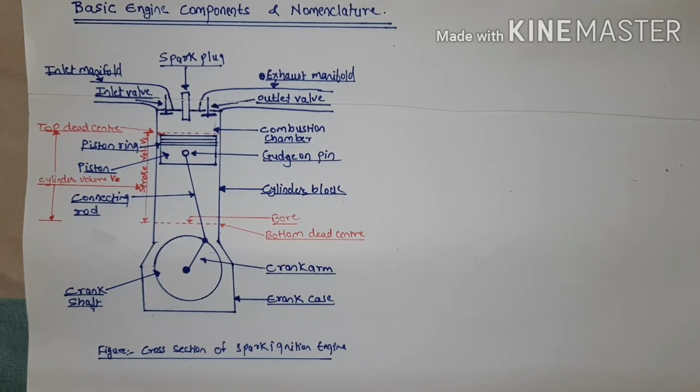Today in this video, I am going to teach you the basic engine components and nomenclature of an IC engine. Even though reciprocating IC engines look very simple, they are highly complex machines. There are more than 100 parts which have to perform their function satisfactorily to produce power output.

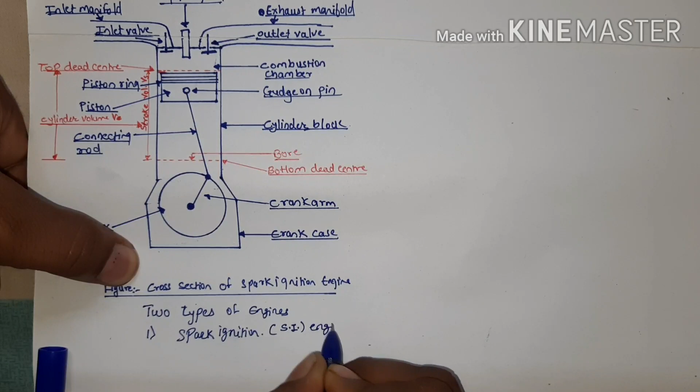There are two types of engines. First, the spark ignition engine, which we can shortly call the SI engine. Second, the compression ignition engine, which we can shortly call the CI engine.

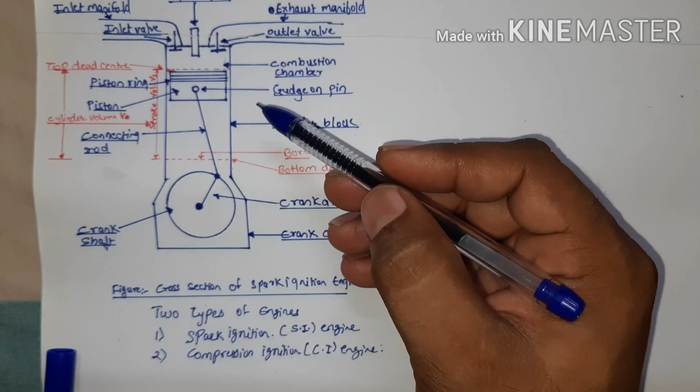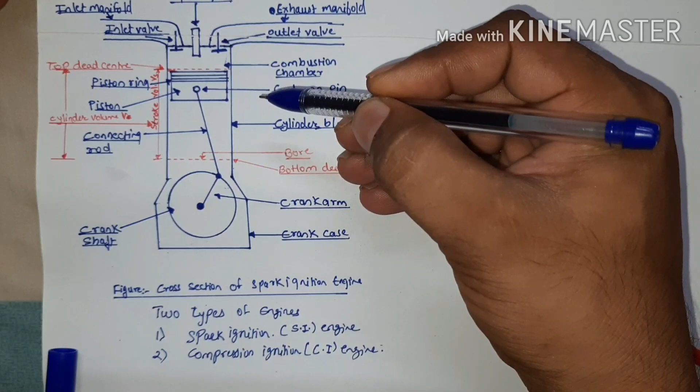Let us now go through the important engine components and the nomenclature associated with an engine. The cross section of the single cylinder spark ignition engine with the overhead valve is shown here in this diagram. The major components of the engine, their function and location I will explain in this video. As you can see, this is the complete assembly of the spark ignition engine.

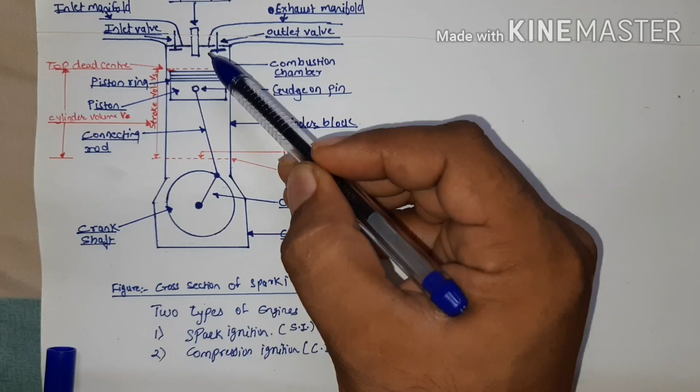The topmost part of the engine is known as the cylinder head. Below the cylinder head, there is a cylinder block. After the cylinder block, there is a crankcase. The main important component of the engine is the cylinder head.

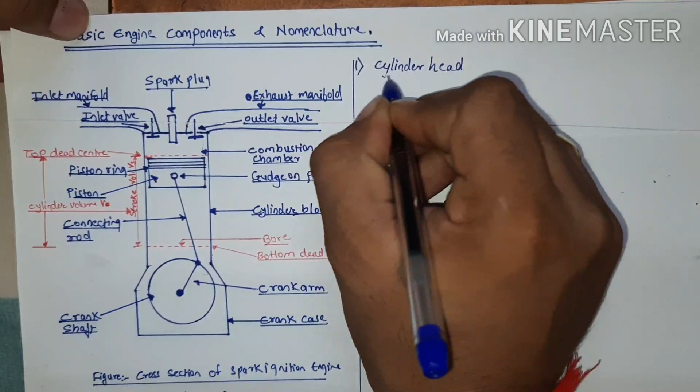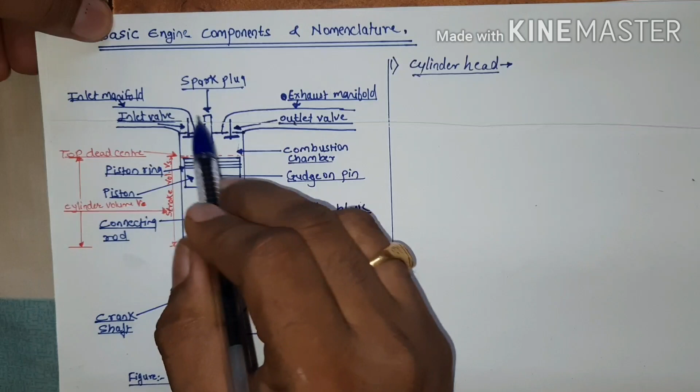The cylinder head consists of various components such as the outlet valve, the inlet valve, the spark plug, and the two manifolds - inlet manifold and exhaust manifold.

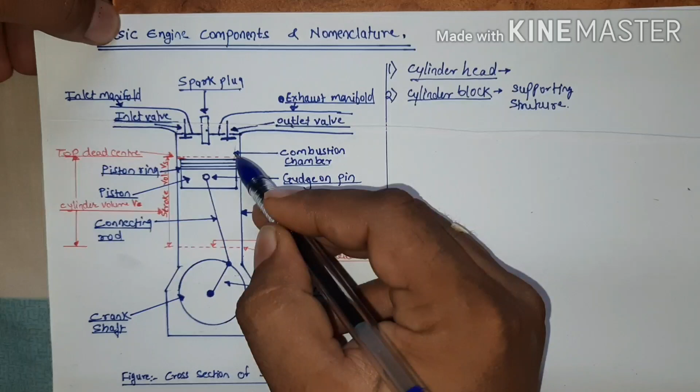Second thing, the cylinder block. The cylinder block is the main supporting structure for the various components. The cylinders of multi-cylinder engines are cast in a single unit called the cylinder block.

Third one is the cylinder. As the name implies, it is a cylindrical vessel or a space in which the piston reciprocates.

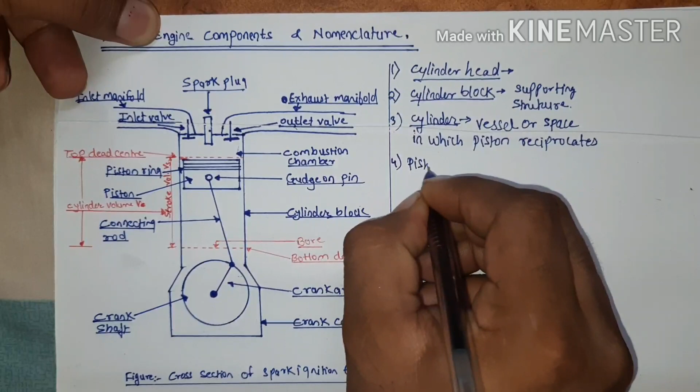Next one is the piston. It is the cylindrical component. As in this diagram, you can see the piston. It fits perfectly into the cylinder, providing a gas-tight space with the piston rings and the lubricant.

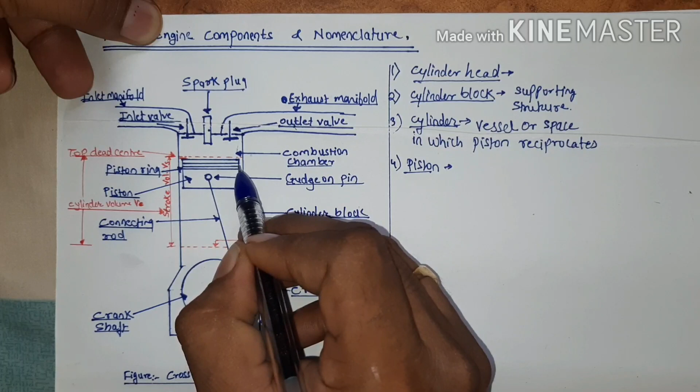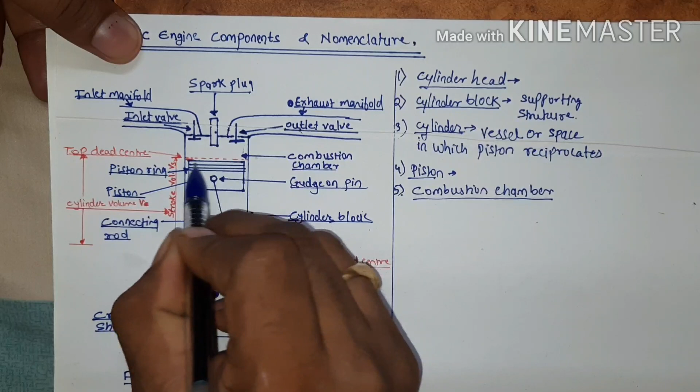Next, combustion chamber. The combustion chamber is the space enclosed in the upper part of the cylinder by the cylinder head and the piston top during the combustion process. In simple words, the topmost part of the piston and the downward part of the cylinder head - the area which is covered - that area is known as the combustion chamber.

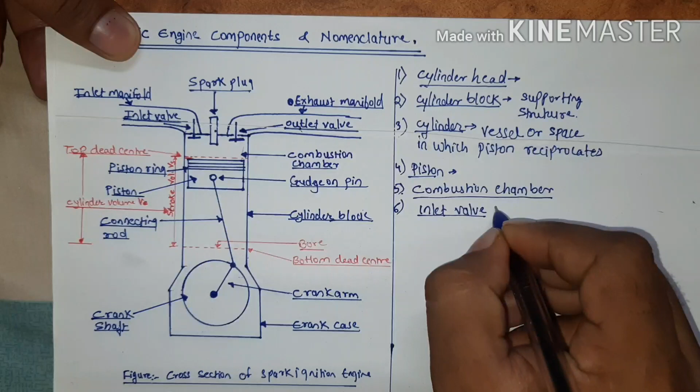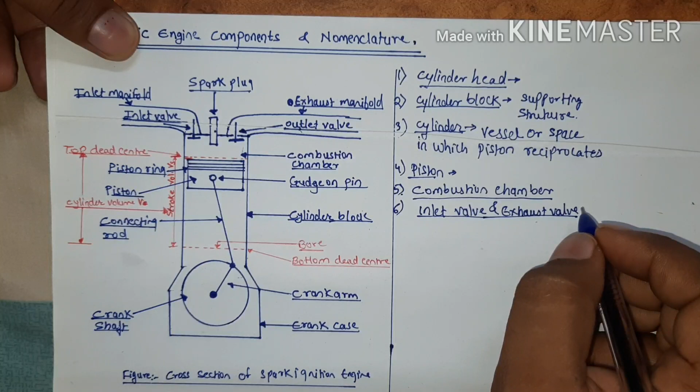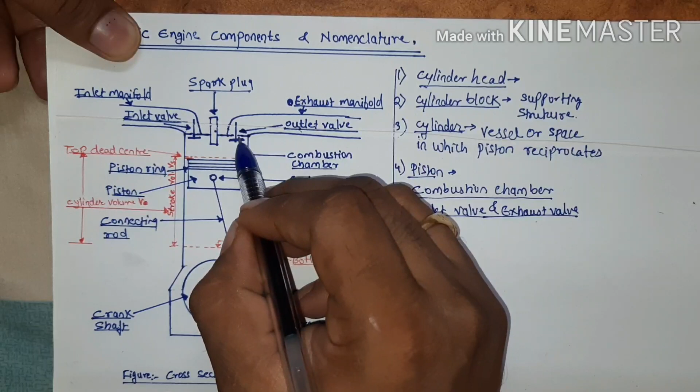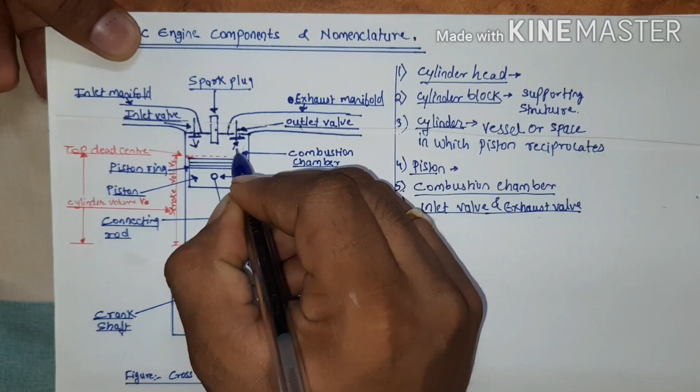Inlet valve and exhaust valve. Valves are commonly mushroom-shaped poppet type. They are provided either on the cylinder head or on the side of the cylinder for regulating the charge coming into the cylinder by inlet, or for discharging the products of combustion, that is exhaust, from the cylinder. The main purpose of the inlet valve is to induct the air-fuel mixture inside the combustion chamber, whereas the main function of the exhaust valve is to discharge the exhaust gases from the combustion chamber through the exhaust manifold.

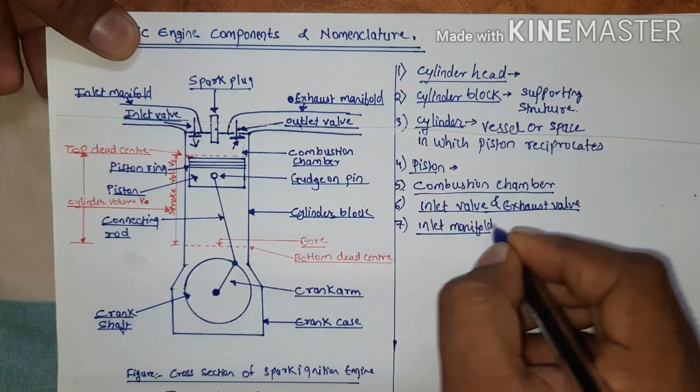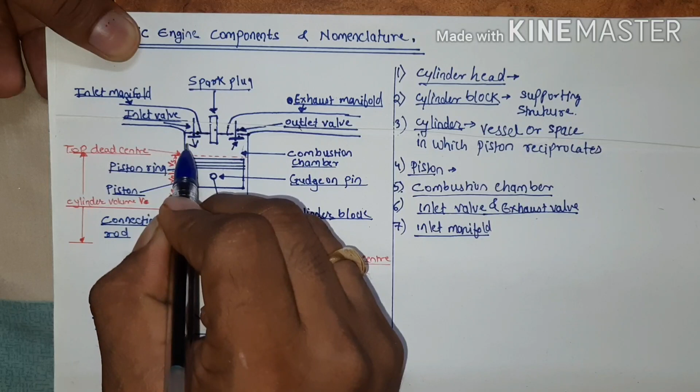Point 7, inlet manifold. The inlet manifold is the pipe which connects the intake system to the inlet valve of the engine and through which the air and fuel mixture is drawn into the cylinder. This is called the inlet manifold. In simple words, the pipe which is connected to the cylinder head and consists of the inlet valve to draw the air fuel mixture into the cylinder is known as the inlet manifold.

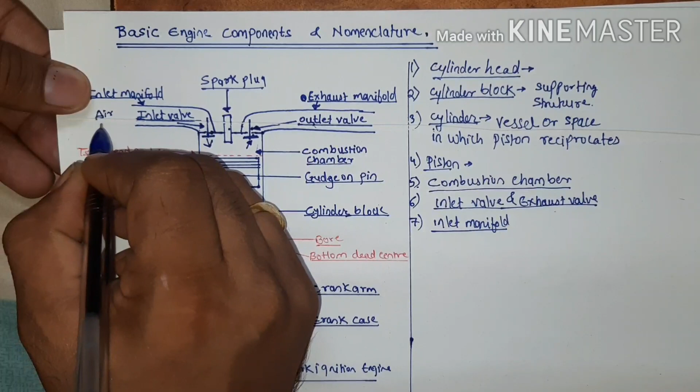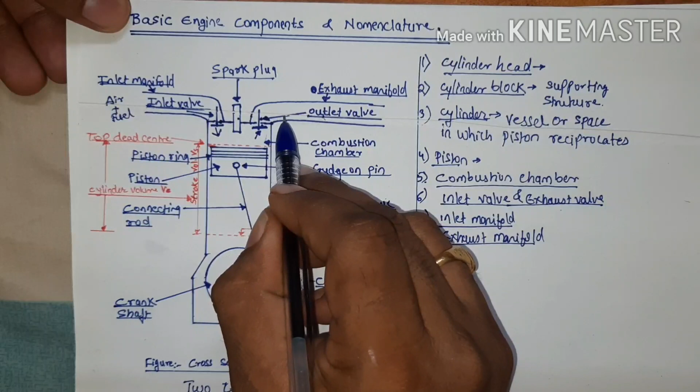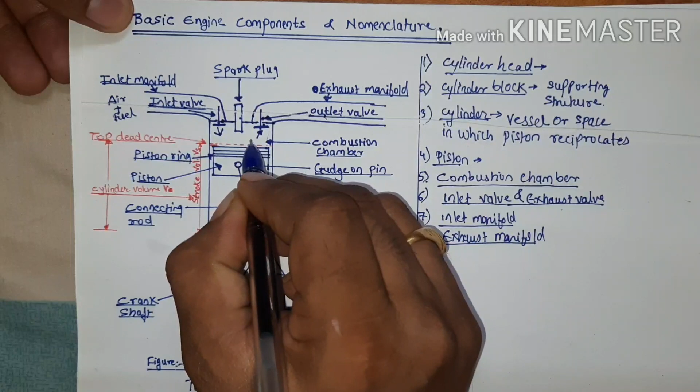Exhaust manifold. The pipe which connects the exhaust system to the exhaust valve of the engine and through which the products of combustion escape into the atmosphere is known as the exhaust manifold. The pipe which is connected to the exhaust valve to discharge the burned gases is the exhaust manifold. Next, spark plug.

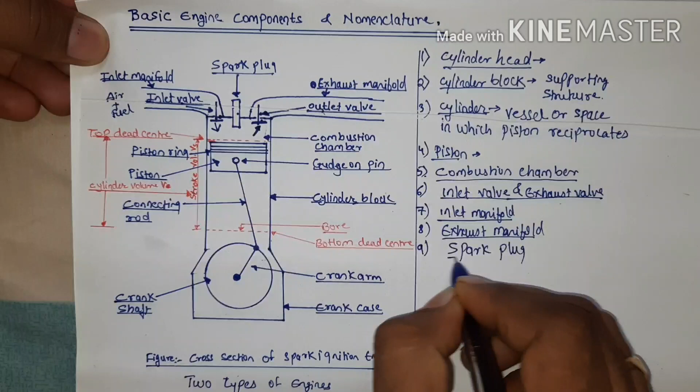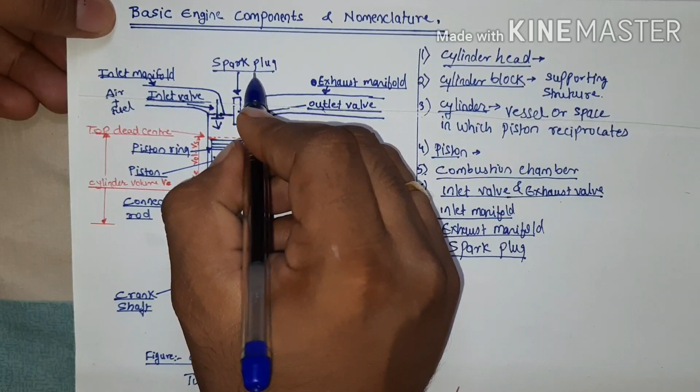Here you can see the spark plug. It is the main component to initiate the combustion process in the SI engine and is usually located in the cylinder head. 10th one is the connecting rod.

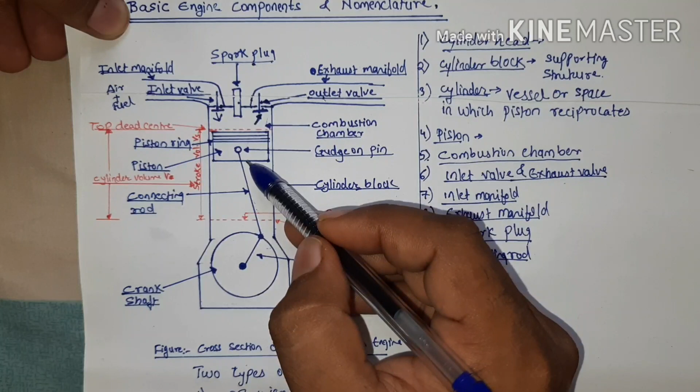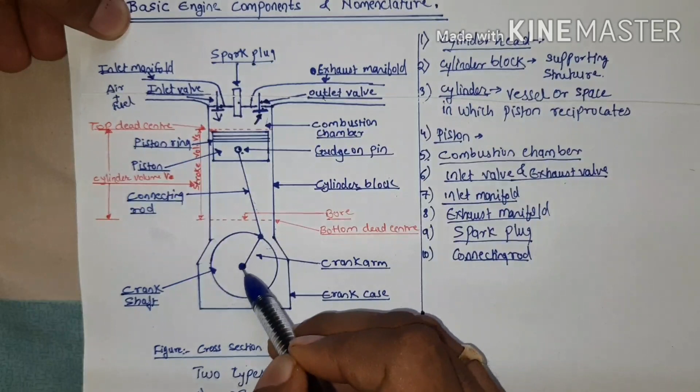Here you can see the connecting rod. It interconnects the piston and the crankshaft and transmits the gas forces from the piston to the crankshaft. The two ends of the connecting rod are called the small end and the big end. The small end is connected to the piston with the help of the gudgeon pin, and the big end is connected to the crankshaft by the crank pin.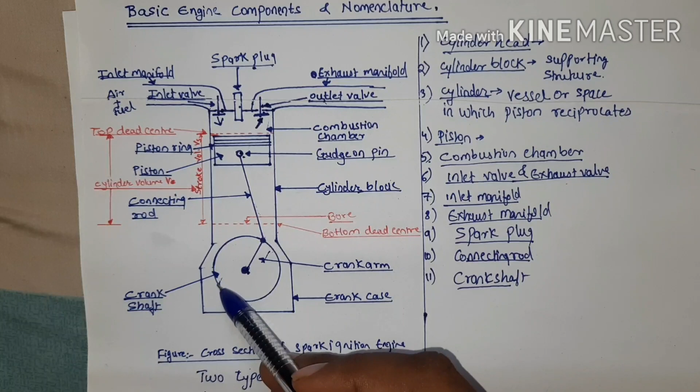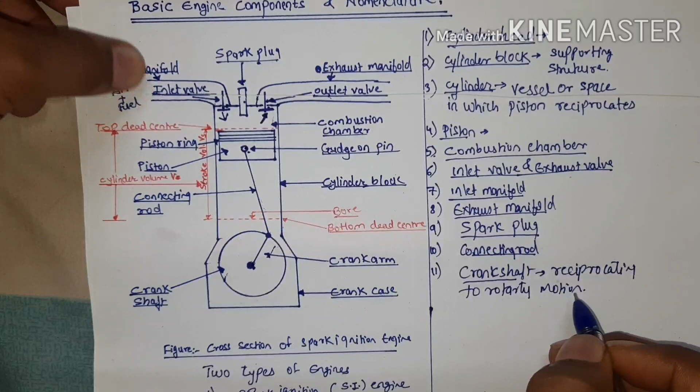Point 11, crankshaft. Here you can see the crankshaft. It converts the reciprocating motion of the piston into rotary motion. In the crankshaft of a single cylinder engine, there is a pair of crank arms and balance weight. The balance weights are provided for static and dynamic balancing of the rotating system.

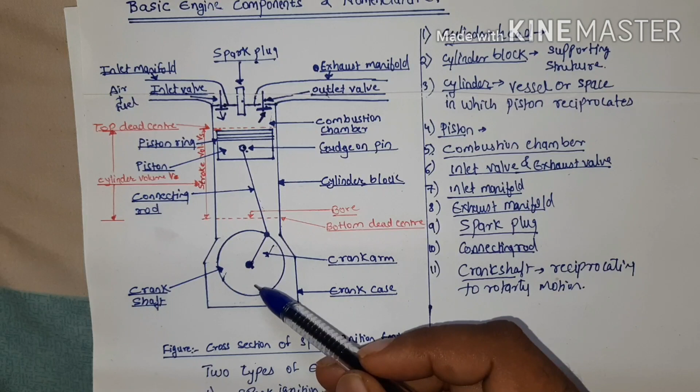In this diagram, I cannot show you the balance weight as this is a cross-section diagram, but in the 3D animation it can be shown. The crankshaft is enclosed in the crankcase.

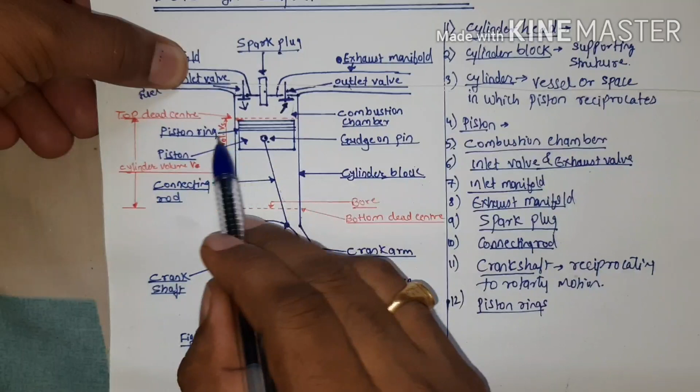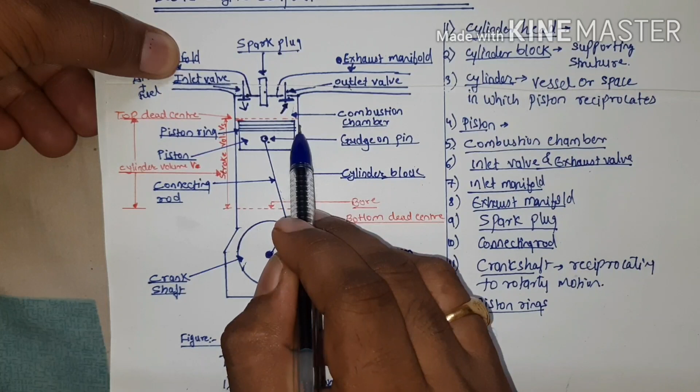Point 12, piston rings. Here you can see there are 3 piston rings. Piston rings are fitted into the slots around the piston and provide a tight seal between the piston and the cylinder walls, thus preventing the leakage of combustion gases. In this diagram I have kept a distance so that you can see them, but there is no gap between the piston rings and the cylinder.

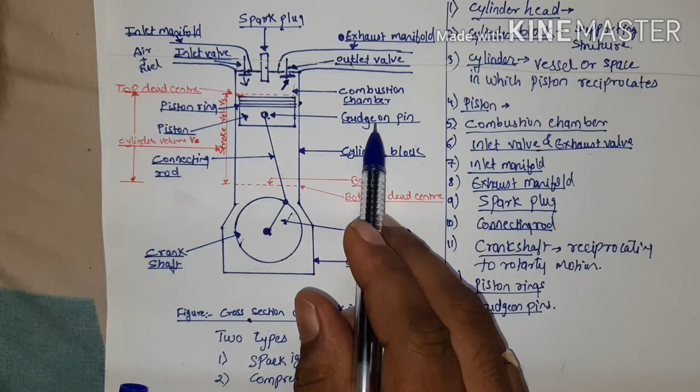Gudgeon pin, also known as the wrist pin or piston pin. It forms the link between the small end of the connecting rod and the piston.

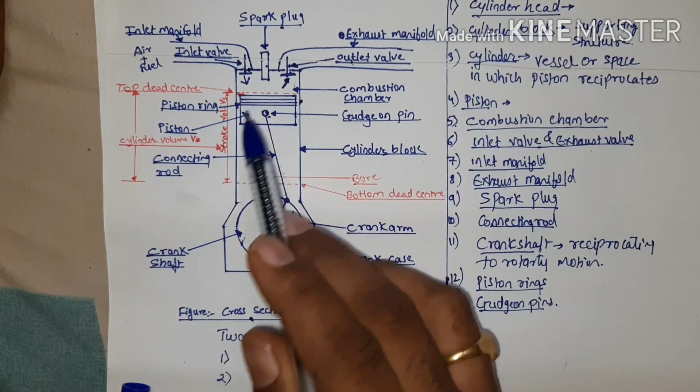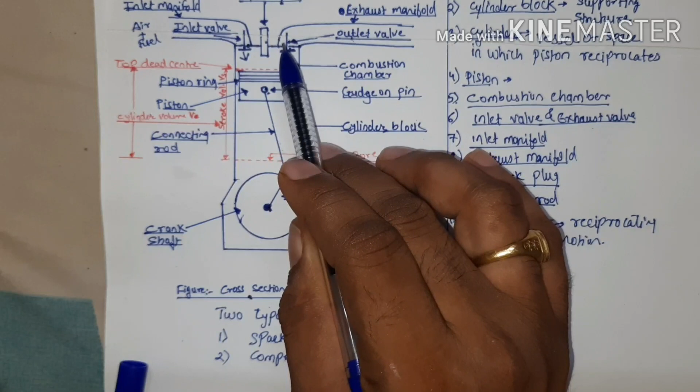Camshaft. The camshaft and its associated parts control the opening and closing of the two valves, the inlet valve and exhaust valve, as shown in this diagram. The push rods, rocker arms, valve springs and tappets are connected to the camshaft. This shaft also provides the drive to the ignition system.

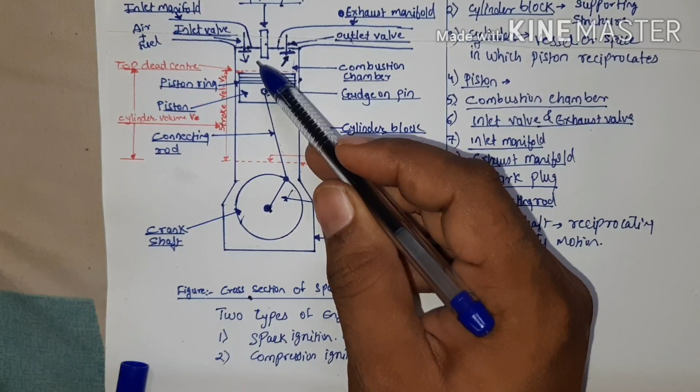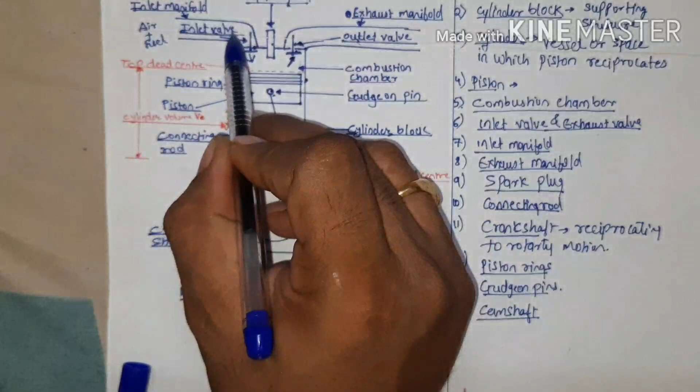The camshaft is driven by the crankshaft through the timing gears. Here there is a camshaft with bearings, and on that camshaft there is a small timing gear. The timing gear is connected to the camshaft as well as the crankshaft with the help of a timing chain.

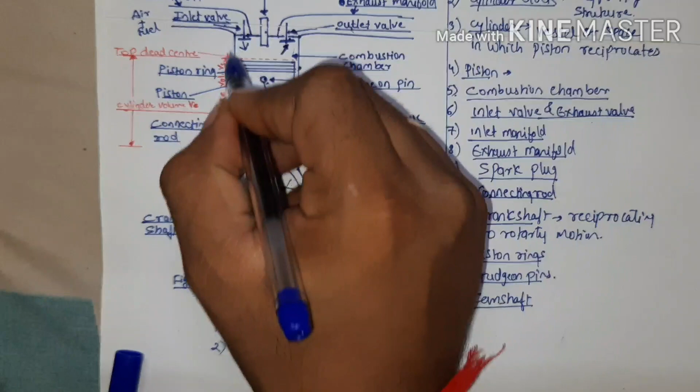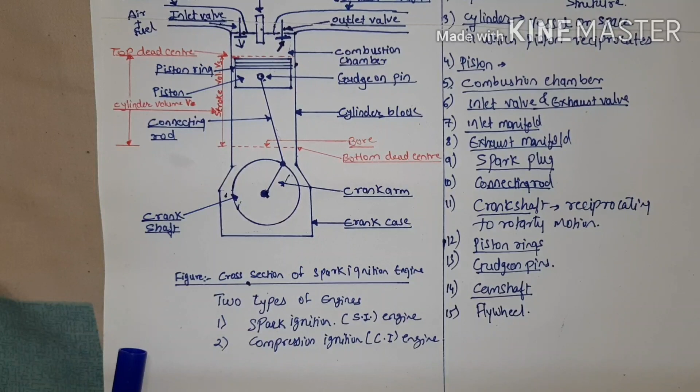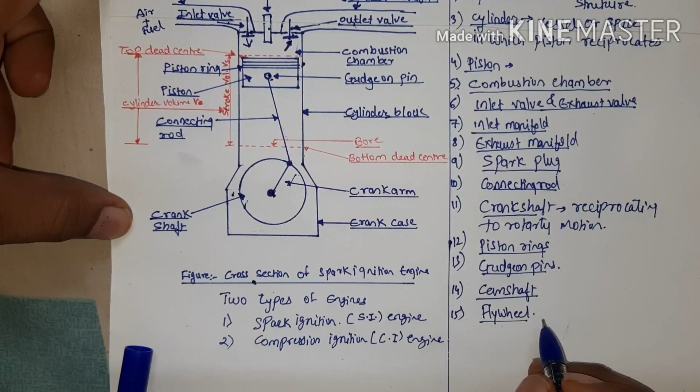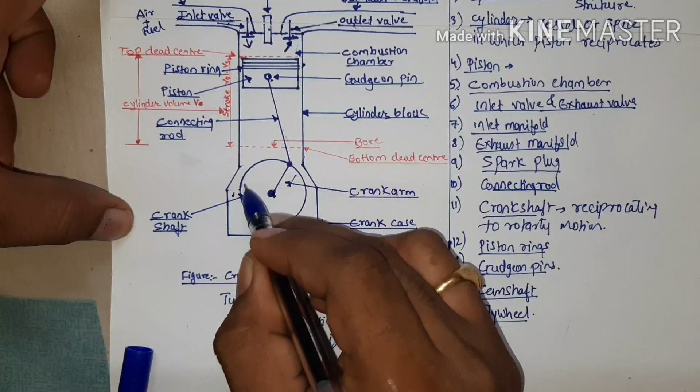The 15th point is the flywheel. A flywheel is a rotating mechanical device that is used to store rotational energy. The flywheel is located on one end of the crankshaft and serves various purposes. When the heavy flywheel rotates, it gives a smooth and natural riding motion, resulting in a better and more efficient riding experience.

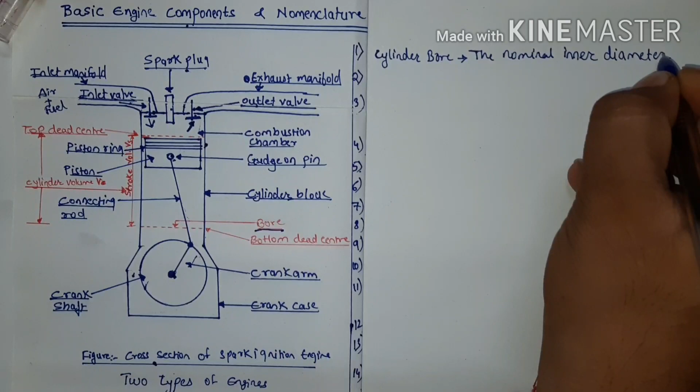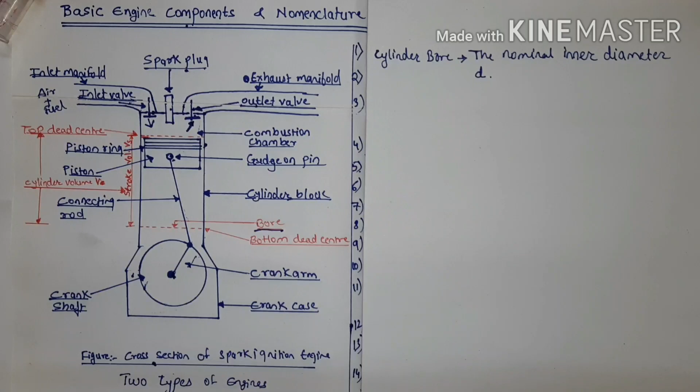Now I will explain the nomenclature of the IC engine, starting with the cylinder bore. The nominal diameter of the working cylinder is called the cylinder bore, designated by the letter D, and usually expressed in millimeters.

In this diagram, I have shown a dotted line in red color. From this point to this point is the inner diameter of the cylinder block, and the inner diameter of the cylinder block is known as the cylinder bore.

The next point is the piston area. The area of a circle with diameter equal to the cylinder bore is called the piston area. It is designated by the capital letter A and expressed in square centimeters.

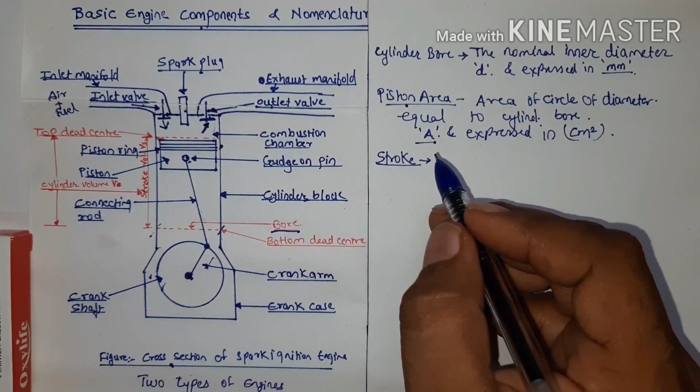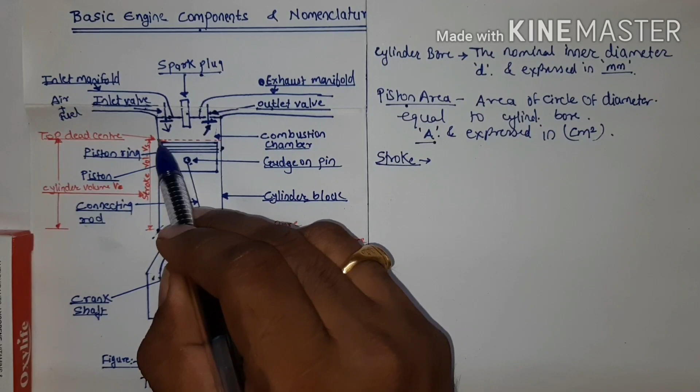The third point is the stroke. The nominal distance through which the piston moves between two successive reversals of its direction of motion is called the stroke. In simple words, when the piston travels from bottom dead center to top dead center, that vertical length is known as the stroke length. The stroke is designated by the capital letter L and usually expressed in millimeters.

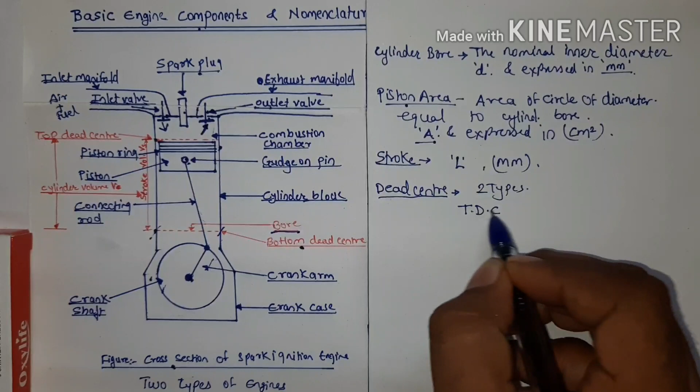The fourth point is dead centers. The position of the working piston and the moving parts mechanically connected to it, at the moment when the direction of piston motion is reversed at either end of the stroke, is called a dead center. There are two types: the top dead center and the bottom dead center, abbreviated as TDC and BDC.

Top dead center is the dead center when the piston is farthest from the crankshaft.

Bottom dead center is the dead center when the piston is nearest to the crankshaft.

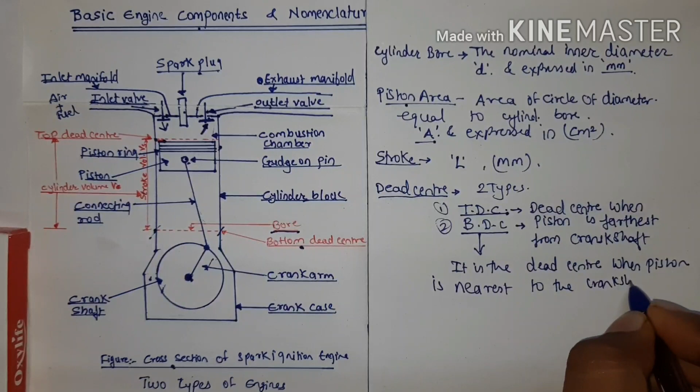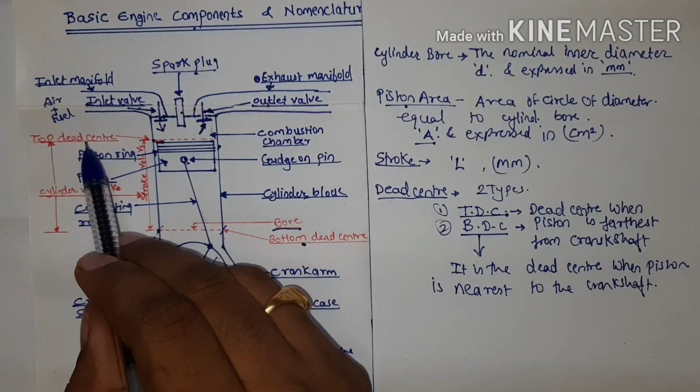As you can see, I have written bottom dead center and top dead center in red pen. Top dead center is the topmost part of the cylinder, and bottom dead center is the bottom part of the cylinder block. Next is displacement volume or swept volume.

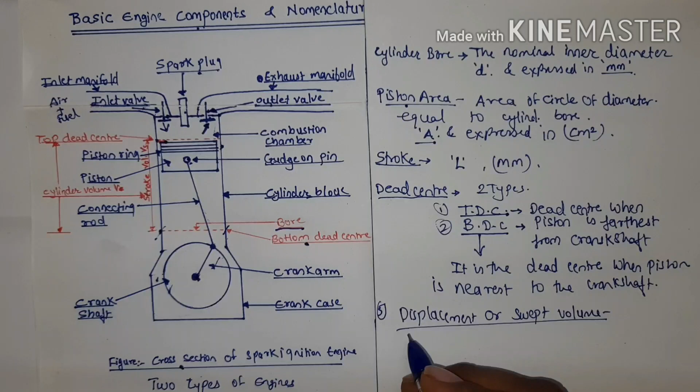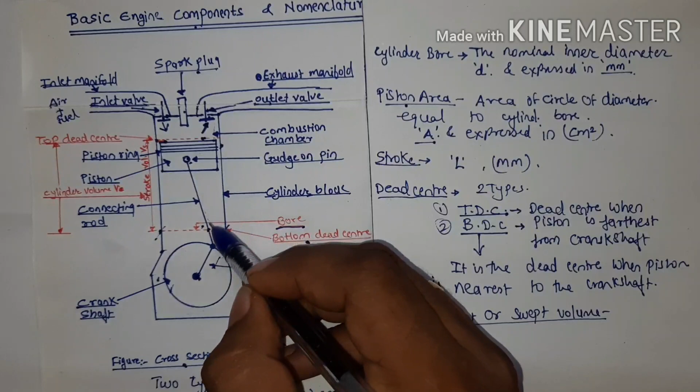The nominal volume swept by the working piston when traveling from one dead center to the other is called the displacement volume. In other words, when the piston travels from bottom dead center to top dead center or vice versa, the volume swept by the piston is known as the swept volume, expressed in cubic centimeters.

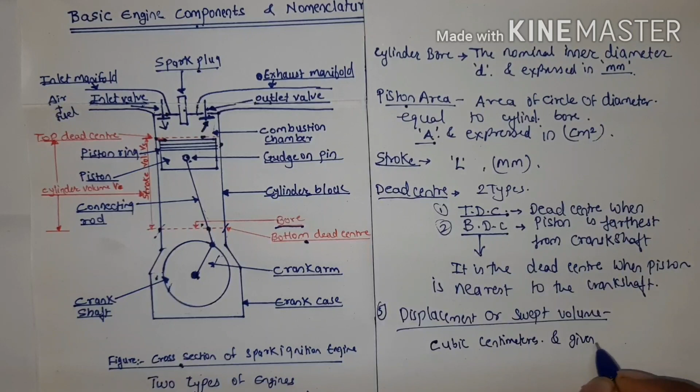It is given by Vs equals A into L, or pi by 4 times D squared times L.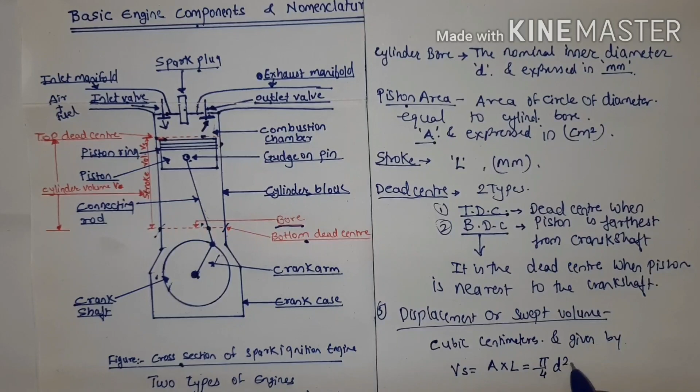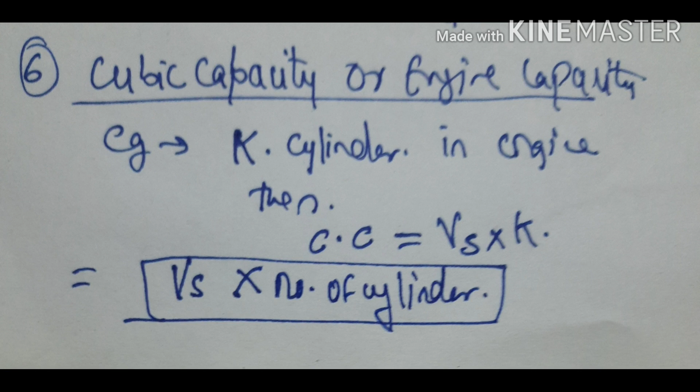The sixth point is cubic capacity or engine capacity, defined as the displacement or swept volume multiplied by the number of cylinders. For example, if there are k number of cylinders in the engine, the cubic capacity or engine capacity is given as displacement volume into k. This is how we find the cubic capacity of the engine.

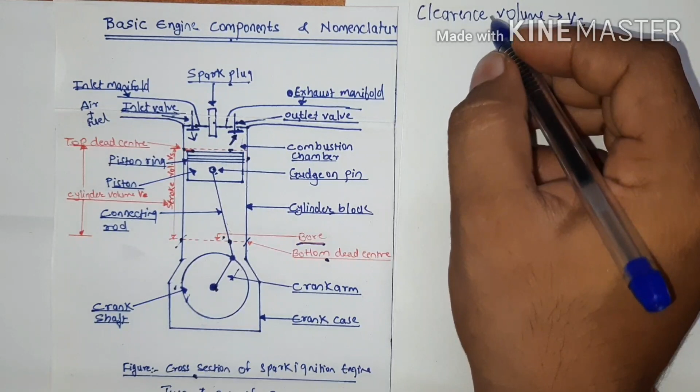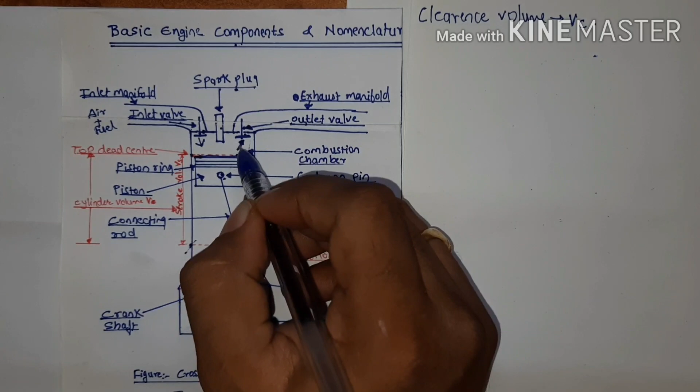Next point, clearance volume, noted by Vc. The nominal volume of the combustion chamber above the piston when it is at top dead center is the clearance volume. In simple words, the nominal volume of the combustion chamber above the piston when the piston is at top dead center is the clearance volume. It is noted by Vc and expressed in cubic centimeters, that is cc.

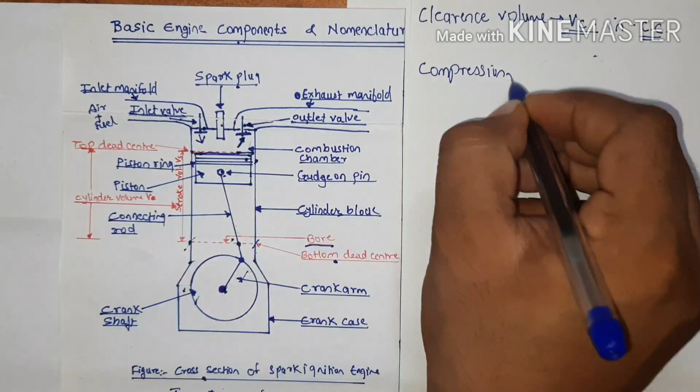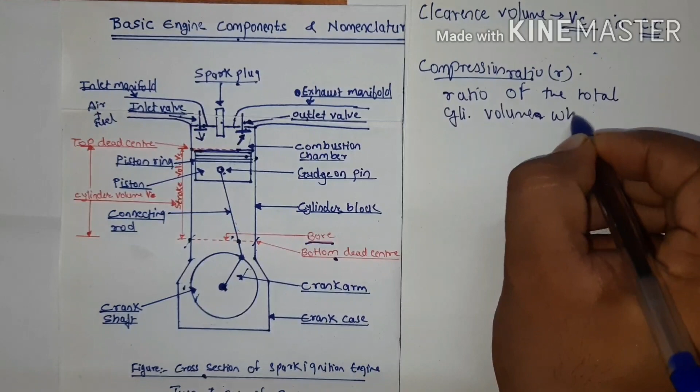Next and last, compression ratio, noted by small r. It is the ratio of total cylinder volume when the piston is at BDC to the clearance volume.

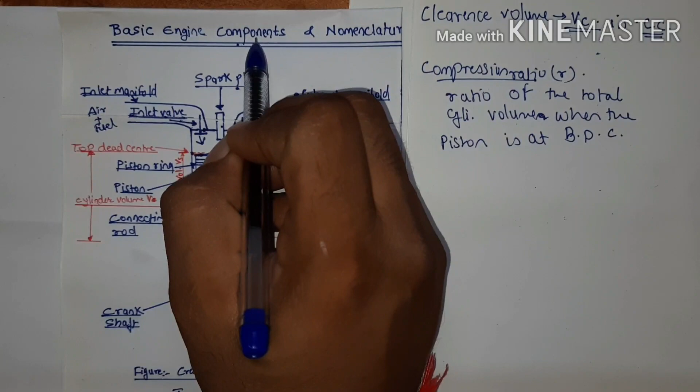So in this way, I have explained the basic engine components with the help of a diagram, and also explained the nomenclature of an internal combustion engine with specific points. I hope you understand this topic clearly, and if any student has any kind of query, kindly comment so that I can answer your questions.